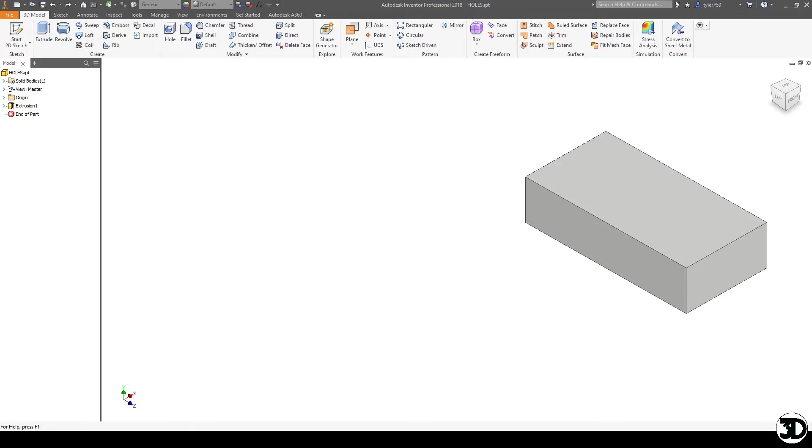In this video, we're going to discuss holes and how to design them. The first way is going to be using the extrude cut. The second is using the hole feature. I'm also going to discuss some options that are used in the hole feature, but to start off with, we're

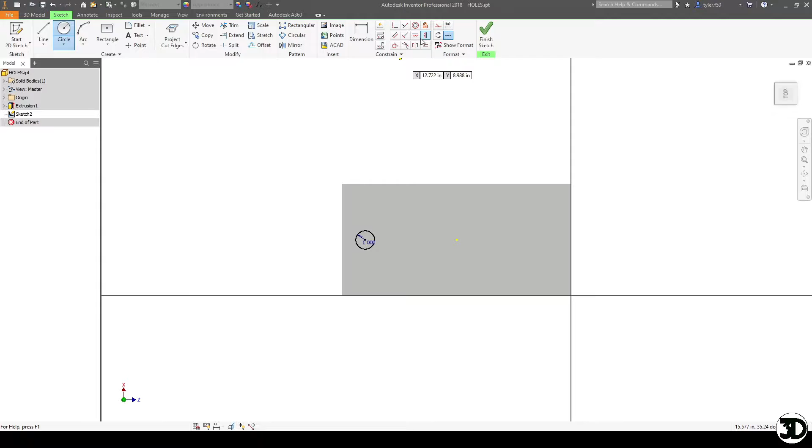going to make a sketch and we're going to make a circle for the hole. I'm going to make it 1 inch in diameter. I'm going to make sure that it is centered to the center point, as you can see here. And the next thing I'm going to do is dimension from the center point to the edge of the part to be 1 inch. I'm just going to make it equal to the diameter.

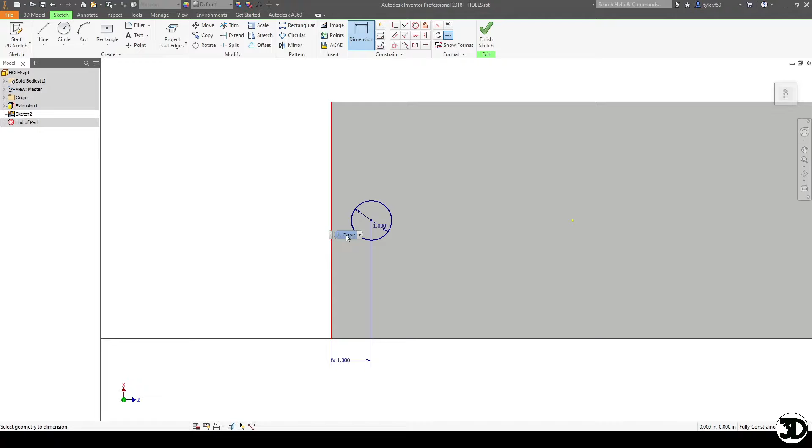And the reason why I'm doing this is because it's a good rule of thumb. Again, you don't have to follow this if you don't want to, but it's a good rule of thumb to have from the center point to the edge equal to the diameter. This will always allow you to have a good amount of material between the edge of the hole to the edge of the part. If you want to go less, feel free to do that, but just be careful as it might change the strength of your part.

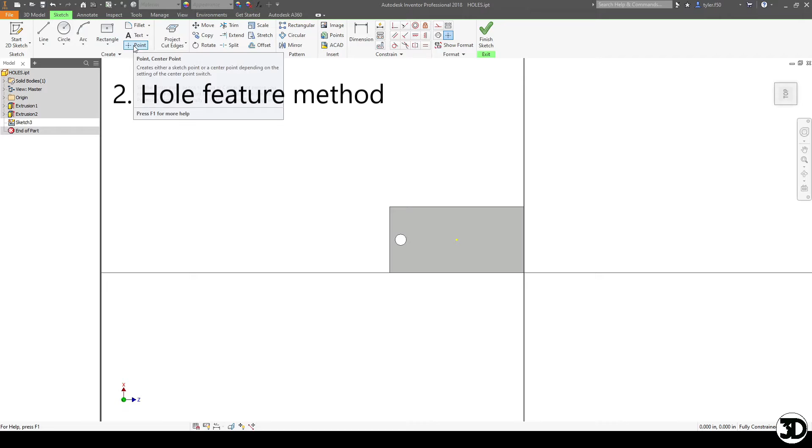So now that we're done, we're just going to do an extrude cut using the cut feature, and I'm just going to choose a distance of all and go OK. Now that that's done, it's pretty simple. Next, what we're going to do is another sketch, and we're going to use the point or center point function in the sketch. I'm going to draw 3 circles or 3 points for different holes. I'm going to make sure that they are constrained with the center.

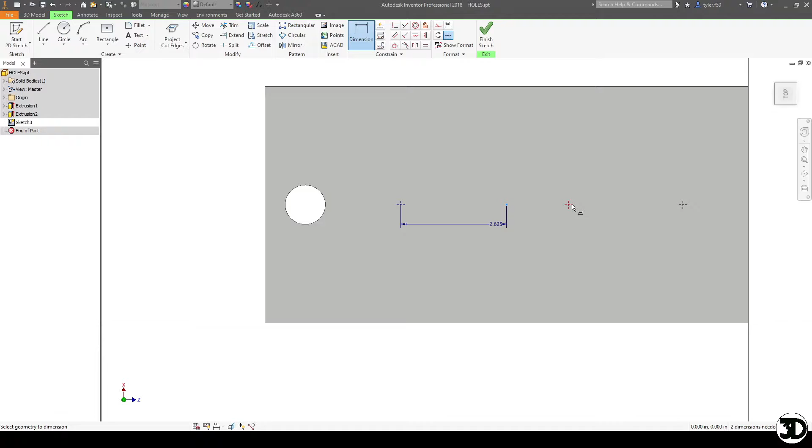And then I'm just going to do a quick dimension. I'm going to make the first one, let's say, 2.625. Make the second one 1.5 inches. I'm going to make the last one, let's say, 2.5. I'm going to finish the sketch, and now I'm going to use the hole feature.

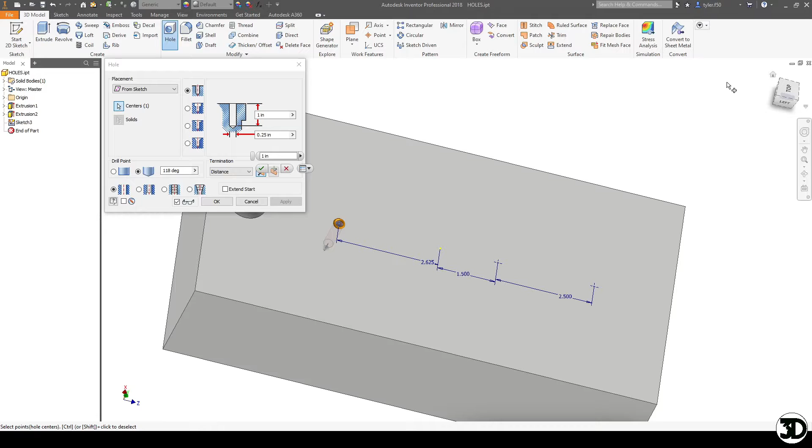So the first thing I'm going to actually do, before I start using the hole feature, is press Control and click the last 2 holes here, so that I'm only using the 1 point. And I'll be going into more detail as to why I'm doing this. But to start off with, we're going to take a look at what the hole feature does with the drilled hole feature. As its name says, it's definitely using the ideas of machining in its principles.

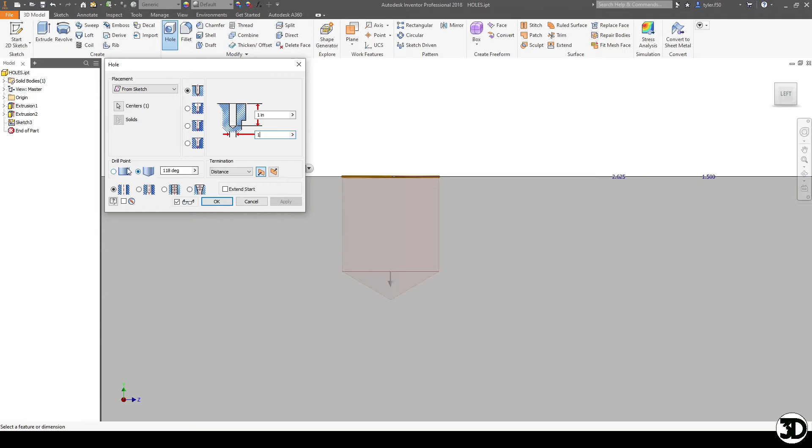So as you can see, there's a straight hole, and then there's a taper, or an angle. This is to be considered for a drill bit, because typically when you machine, you're going to have that angle. But for 3D printing, you don't really need it. If you want it, feel free to keep it, but usually I just go to the flat and make it flat if I'm going to have it at a distance that doesn't go through the whole thing.

The next thing I can do is change this to, let's say, 2.5 inches, so it doesn't go through the whole piece, but it's still there. So now that we have that done, we have our second hole done. So what I'm going to do now is I'm actually going to go to the tree here. I'm going to press down arrow on the hole.

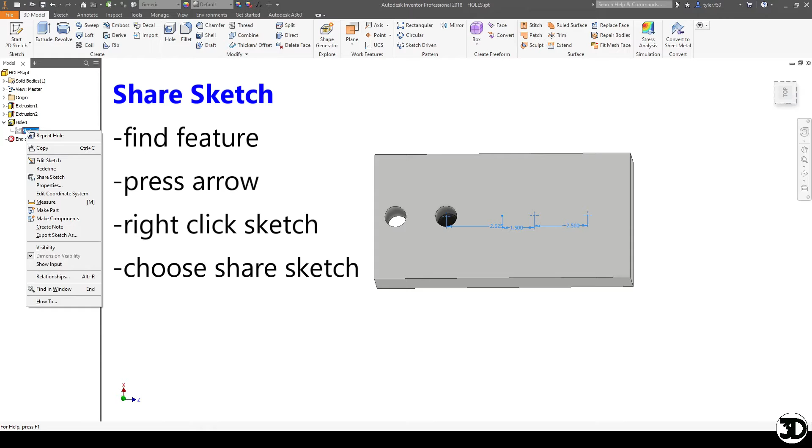I'm going to right click the sketch, and now I'm going to go to share sketch. The reason why I'm doing this is now I can do the holes for the other 2 with the exact same sketch. It's a really handy feature to use, especially if you have certain geometries that fit together, because then if you make a change, it'll actually go across all the features that are using that one sketch, as opposed to using compounded sketches and having to change each one.

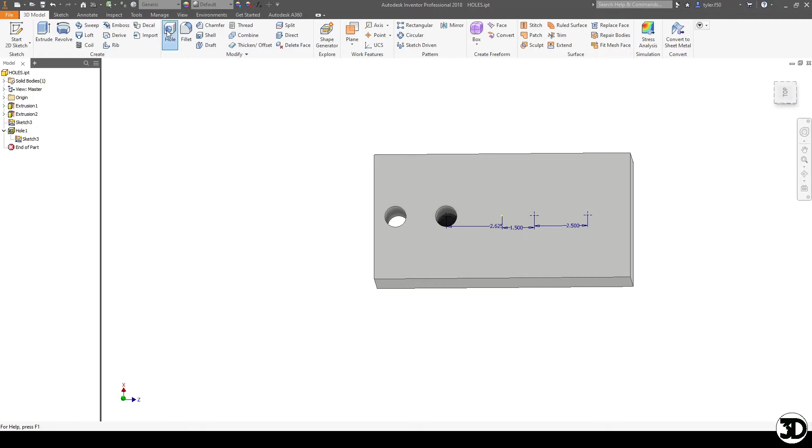So now what we're going to do is another hole. Again, I'm going to press Control and then click, so I only have the 1 hole. And now we're going to use the Counterbore or spot face feature. These are one and the same. The only difference is that for machining, they do a spot face to have a flat surface for a bolt, so that it has an even surface to grab onto. It's not very common, but in certain circumstances it's needed. But a Counterbore is the same idea.

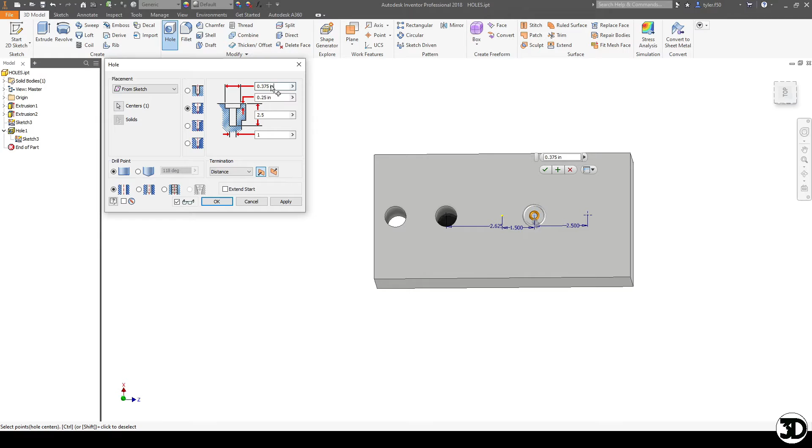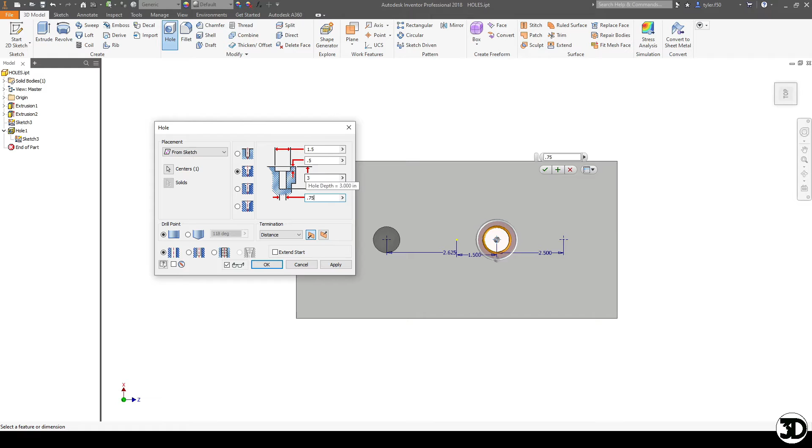So essentially what I'm going to do is change the information in here to work. The first option I have is the diameter of the Counterbore itself. I'm going to make this 1.5 inches. It then asks me what's the depth I want. I'm going to make that 1/2 inch, just choosing options here. I'm then going to make the entire hole 3 inches to go through the part. And the last thing I'm going to do is change this to be 0.75, just because.

So now you can see that there is a step down and then the hole goes through. This is typically used for bolts that you want to be flush to the surface so it doesn't protrude on the top. The only other thing you'd want to consider is make sure to figure out the size of the socket that the bolt would be grabbed with, so that you can make the Counterbore hole that size plus at least a 1/16 or 32nd, so you can fit that socket in there to torque it. And that's essentially what you do for that feature. And then click OK.

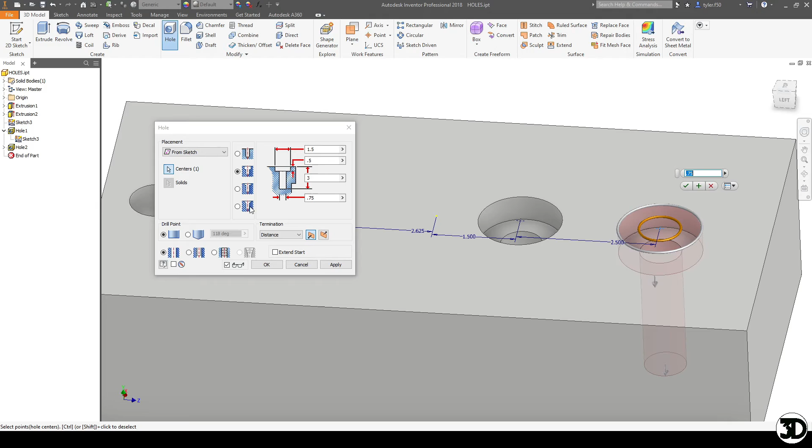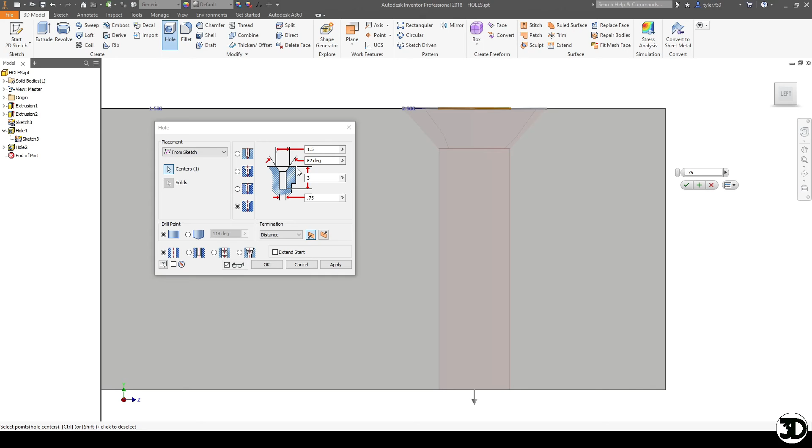So we're going to go to the last feature here, which is the Countersink hole. It's very similar in ideology to the Counterbore. The only difference being this has a tapered angle at the top and then it goes straight down. This is for a specialty type bolt that typically sits flush to surfaces by using the angle itself. So it's using the same information as a Counterbore, the only difference being that it has the overall diameter of the top, an angle, which is the typical angle for those special bolts. You choose the overall distance, and then of course the diameter. Once you're finished, you click OK, and now you have both of those features done.

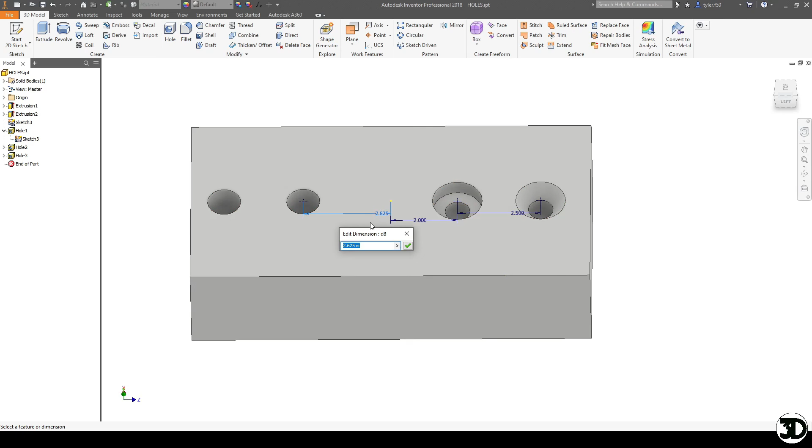The nice thing about having a shared sketch as well is I can change these dimensions on the fly. So if I wanted to make this, let's say, 2 inches away from the center point, I can now do that. If I wanted to make this, let's say 2.5, I can change that as well. And it'll update it automatically, and the features won't clash, essentially.